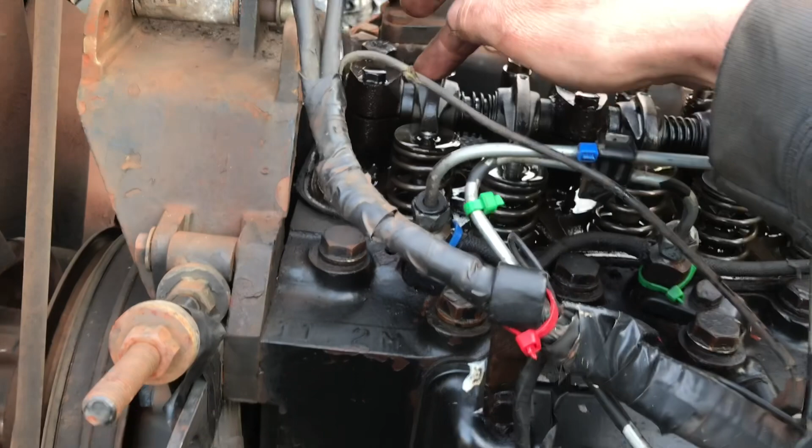We got the valve cover off, and what we're going to do now is, I'm pretty sure this is cylinder number 1, the one nearest to the fan. I will just check on that, but this is what I was told anyway.

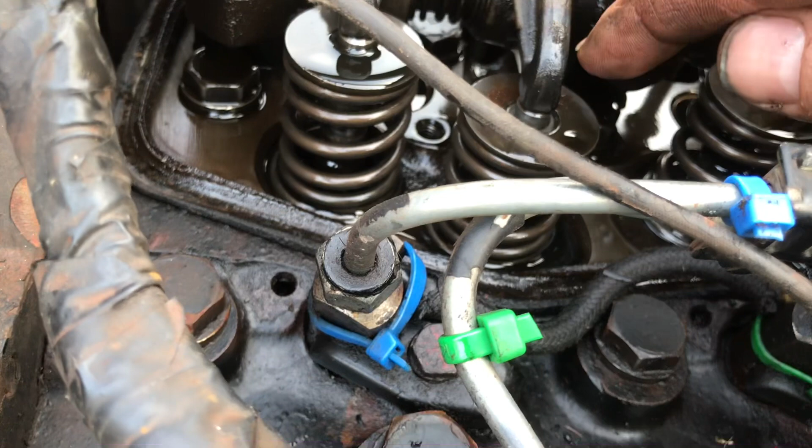It's 0.012 of a thousandth on the inlet and the exhaust, so that gap there on the inlet and the exhaust is going to be 0.012 with a feeler gauge.

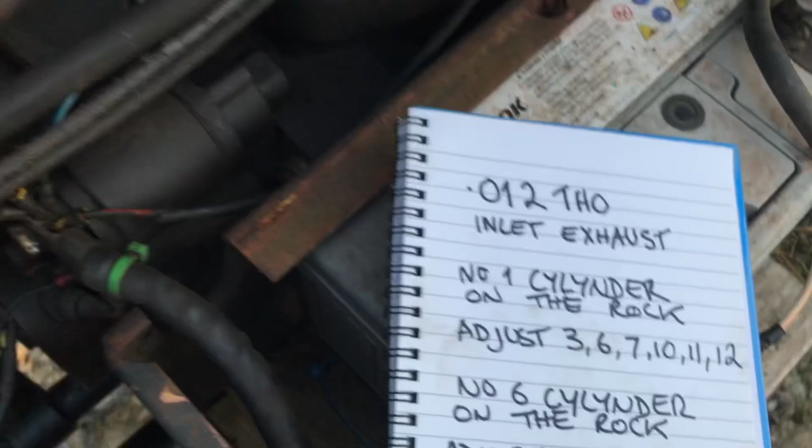So you put the number 1 cylinder on the rock, so basically get it so it's just on the rock between going up and going down, in the middle of when it's going up and when it's going down. Well, you'll know what I mean when you do it, because I haven't done it myself yet.

And then you adjust the 3rd one. Sorry about that, the 3rd one, the 6th one, the 7th one, the 10th one, the 11th one, and the 12th one of the valves.

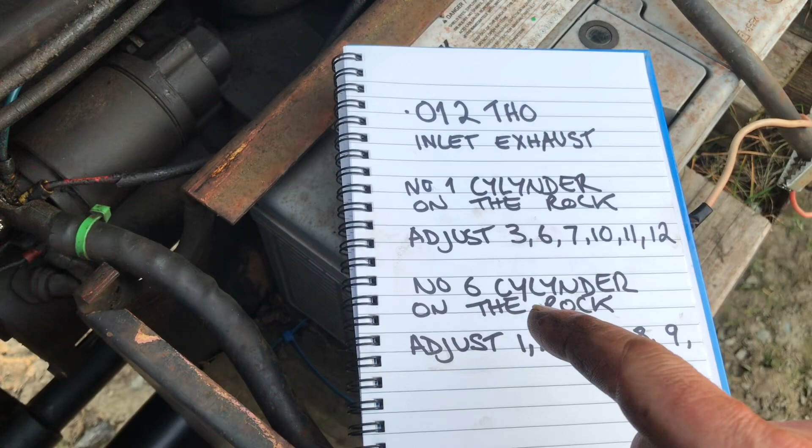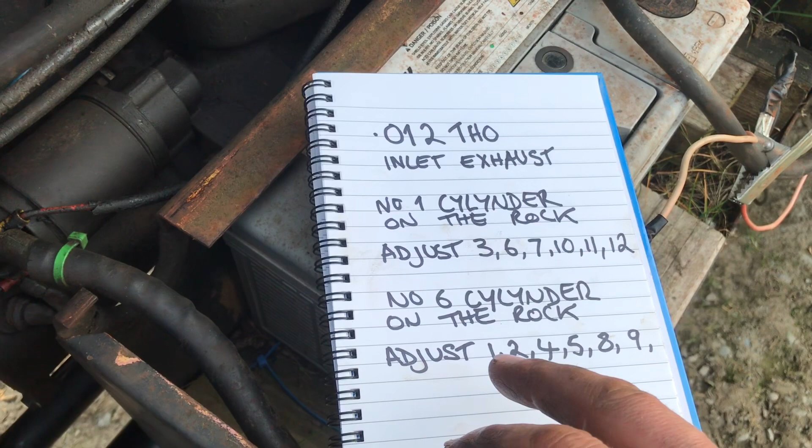Then you move the cylinder, so number 6 cylinder, you put that on the rock, so where it should be, where the valve just opens and between it's just opening and just closing. And then you adjust cylinder number, the 1st valve, 2nd valve, 4th valve, 5th valve, 8th valve, and the 9th valve. So hope you can see all that there.

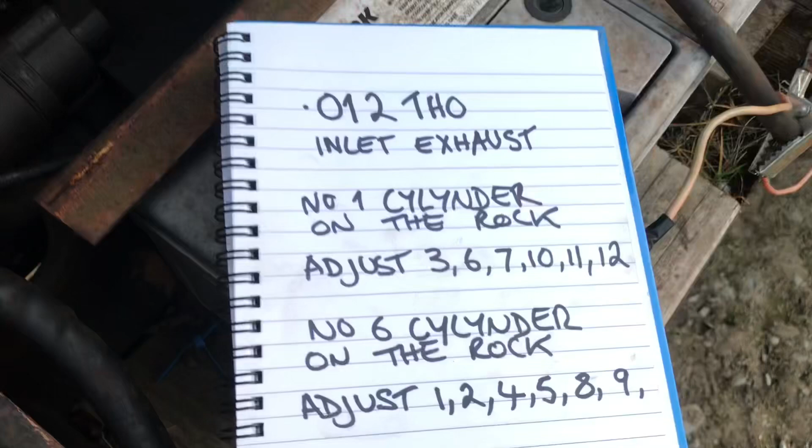And what I mean by valves, I mean these, yeah. If you see what I mean. Sorry, so remember to do it with this thing, with this phone. I'm used to looking at the things. 1, 2, 3, 4, 5, 6, 7, 8, 9, 10, 11, 12.

See? So when you adjust it, I'm pretty sure this is cylinder number 1. So I'll adjust it till that is in the correct place. Gotta be honest, that's in the wrong place at the moment, I think. Don't know though. So if I haven't touched this yet, we'll try that now.

So if that is in the correct place, just say it's landed at random. We adjust number 3, number 6, and number 7. So we adjust that one.

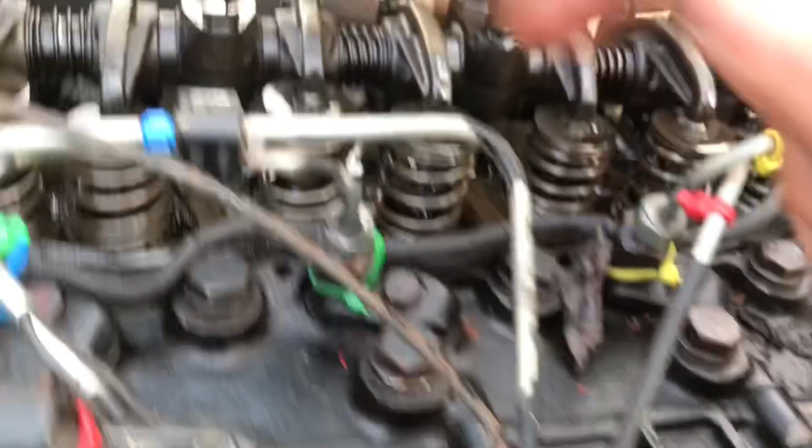1, 2, 3, 4, 5, 6. That one, and that one. So this is going to take me a while, because like I said, I've never done it before, but we'll see how we get on, okay?

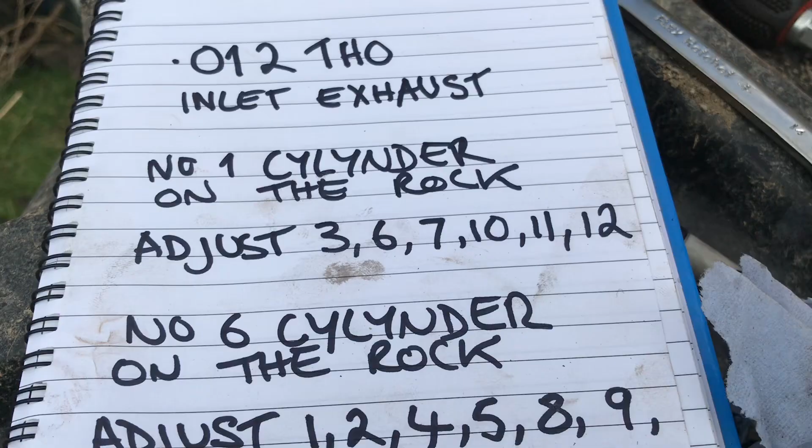First cylinder, which is the one nearest the front, on the rock. Both these valves are closed. And then you do the third one. When the first cylinder's on the rock, the sixth one, the seventh one, the tenth one, eleventh and twelfth. And then we move it so top dead centre is on this cylinder, the same, so both these valves are closed, so they're on the rock where it's going off and on.

And then you adjust 1, 2, 4, 5, 8 and 9. And that should be done now.

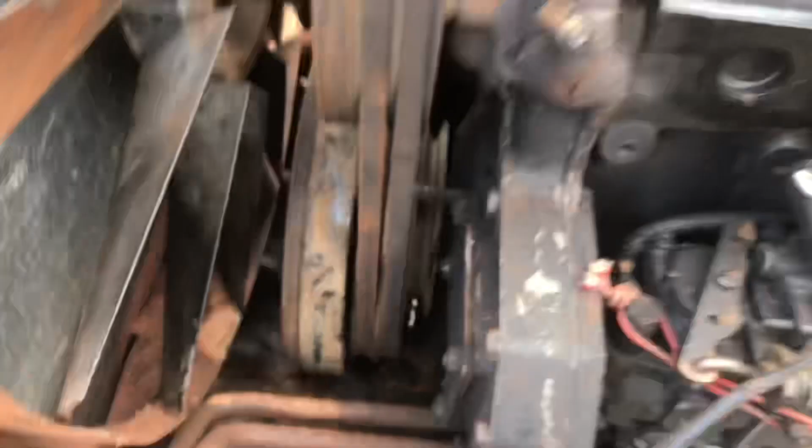I'm not saying this is an easy job, it's a right art actually, because you can't get at anything down here. You can't even get the fan off without getting the radiator off to get to a timing mark. That's the most awkward thing I found. To get into the top is fine, it's just getting everything in the right place. So we'll try this and I'll get back to you.

Basically, you just have to adjust these so they're 0.012 of a thousandth.

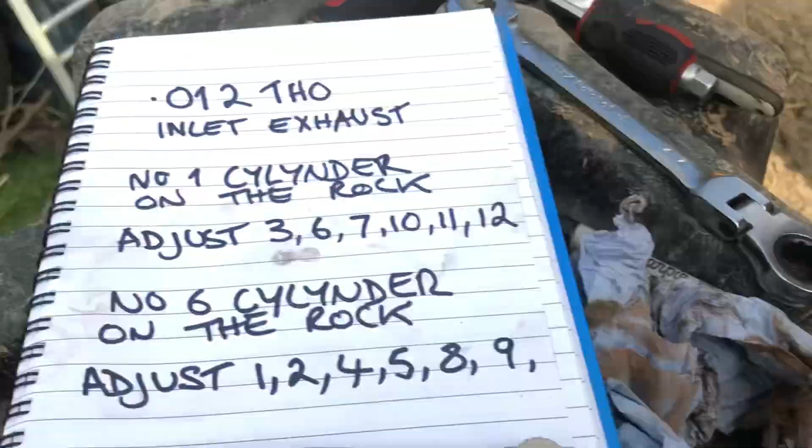If you see, that's the third one there now. Wait a minute. Yeah, sorry, it's a bit more awkward with this thing. See? Adjust it there, over there. Adjust it there, so that is 0.012 thou.

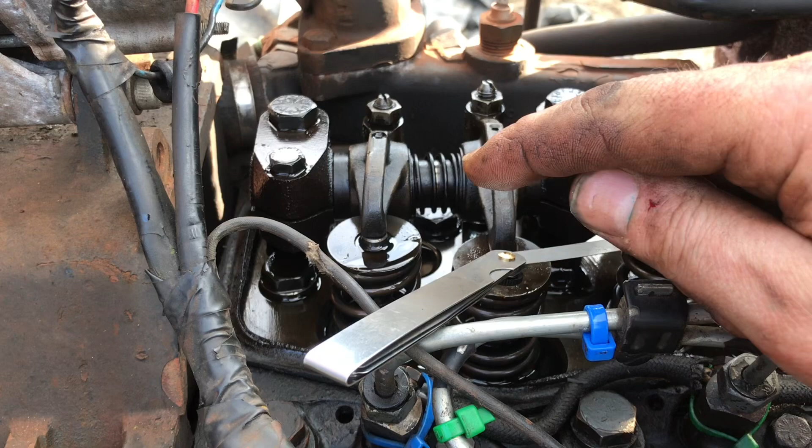When this first cylinder is at top dead centre and both these valves are closed, that's a compression stroke. So I'll just carry on doing this quietly because I have to concentrate, okay? Right, I've adjusted all them now.

I'm not going to lie, that was a bit out there, especially number 1 valve was quite a way out. When that was coming at top dead centre, that was never had any play at all in that one. So that was definitely wrong. This one, most of the rest of them was fine. There was another one that was a little bit out here, but that was the main one. That was definitely not right.

So we've gone through this now, and we'll put the rocker cover on and run it for a bit and see what she sounds like. And I'll get back to you. We might try it again after we've worked it for a bit to see if everything's okay.

Okay, so it sounds like an easy job. It's alright once you get in the right place, but why they haven't got any marks on here, I just cannot understand. I've had to make some myself.

Should have some marks on the flywheel there, surely to Christ. There's a pointer there, look. But you can't get the fan off without getting the radiator off. It's nuts. As usual, it's there, we are, that's it.

Listen to that. Absolutely running like a sewing machine. When these engines are running right, they sound beautiful.

Look at that, this is a 6-cylinder engine. She's had the fuel turned up a good bit, I think. There's plenty of power there, not short of power.

But before I adjusted these tappets, that thing was flickering a bit, it didn't seem right. And obviously this cylinder number 1 was flicking out. So there we are.